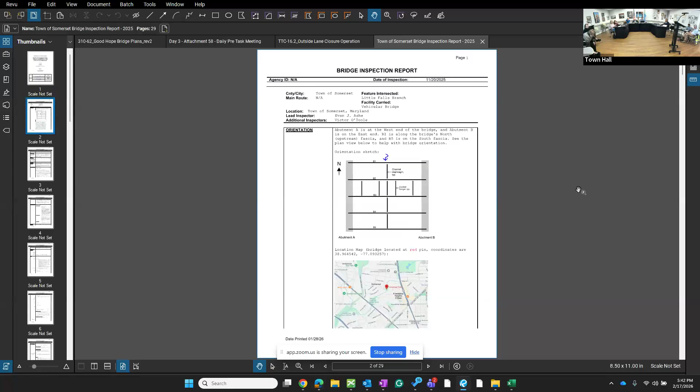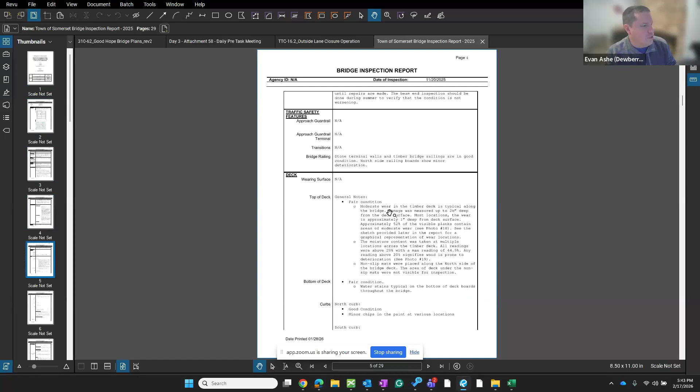So the main findings when we do these bridge inspections... could you zoom in? Sorry about that. For these bridge inspections, we try to get up close to all the major elements of the bridge, and with a bridge this small, we get up close to everything.

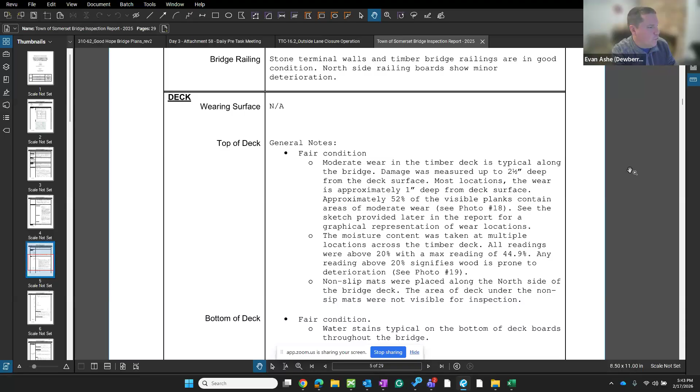The major findings - we don't see any signs that the bridge is overstressed based on the loads currently going over it. However, the one major finding we had was with the deterioration of the steel beams at the ends of the bridge. There's one beam specifically that I was able to take my hammer and just go right through the web of the beam.

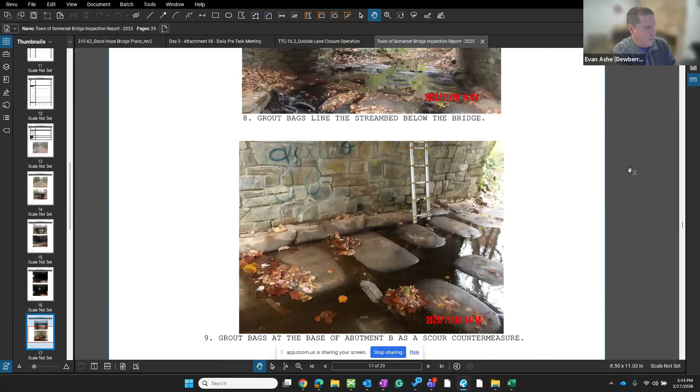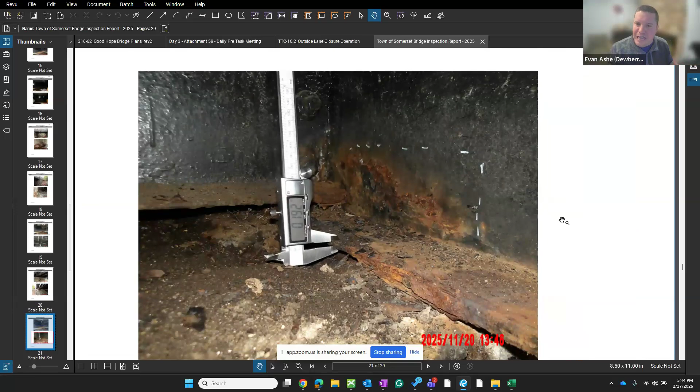Let's bring up a picture of that. I believe it's this one here, and this was similar. This is typical of what you would find at a bridge of this age. The reason it happens at the ends of the beams a lot is that runoff from just prior to the bridge tends to collect at certain ends of the bridge, and this gets a lot of moisture. So this type of defect is the main structural concern that we had.

I believe the major recommendation we made in the report was to conduct some steel repairs at the beam ends. We identified 4 beam ends that should get a repair, and that's what we're working on in the bridge plans.

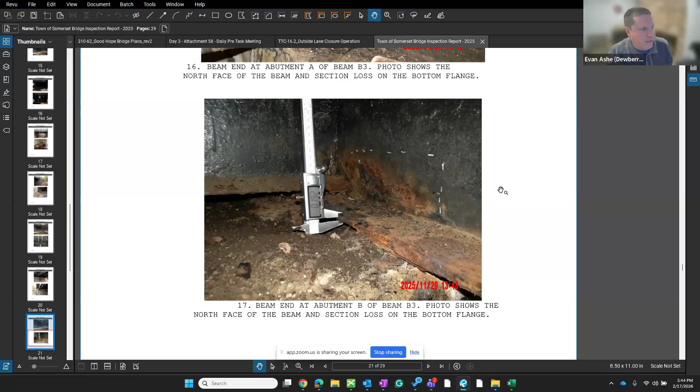In addition to that, there was some deterioration on top of the bridge deck, on the timber boards, and that's typical as well for an older bridge. So the recommendation was to replace essentially all the bridge decking on top of the bridge.

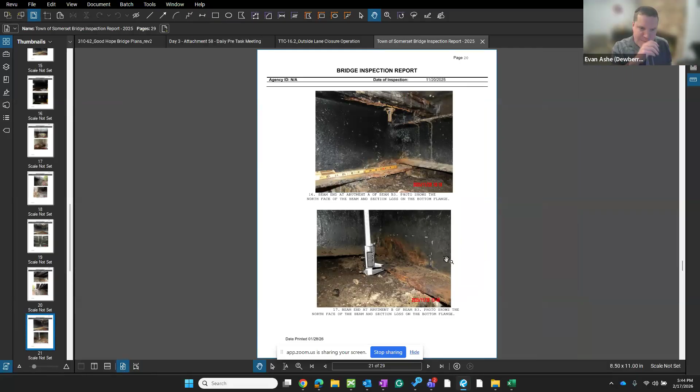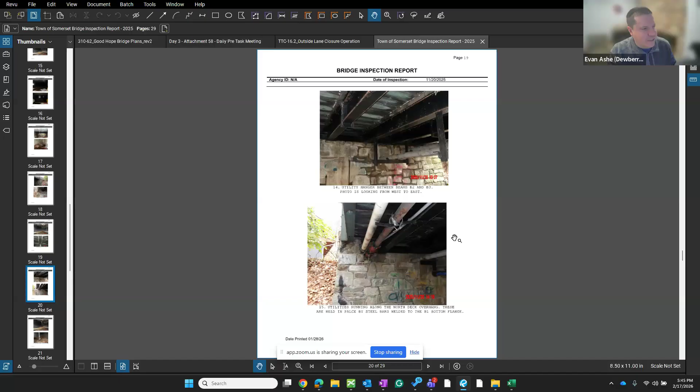We also noted some items under the bridge where the stone facade had some stones fallen out. Since we're out there doing work, we recommended those stones get replaced on the facade of the bridge.

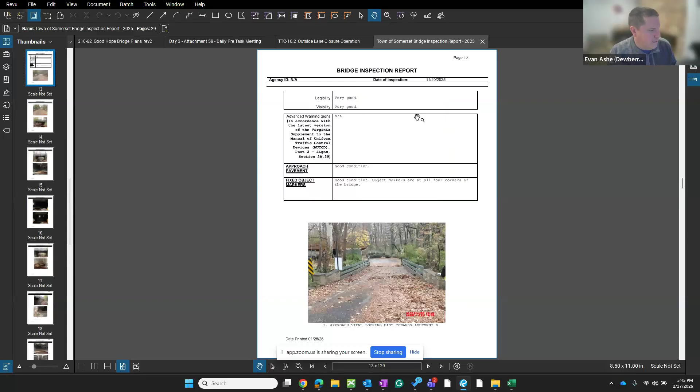We had a lot of leaves last time we were out here - let me bring this up. The last thing we recommended was to address a drainage issue that we think contributes to the beam end deterioration. If you look at the approach to the bridge, on the other side of the speed bump, water tends to flow down this slope and collect at this corner of the bridge, which is where the major beam deterioration was taking place. So as another part of the bridge repair plans, we're developing details to put a drain here to collect this runoff and hopefully protect these beams and extend the life of the repairs being put in place.

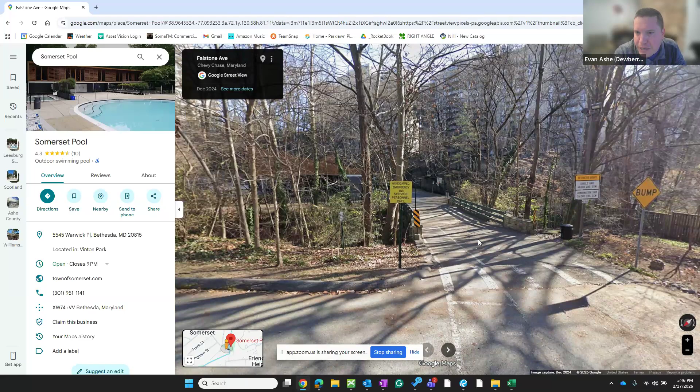So those are the major elements, and I think the repair recommendations in the report are what generated us to start working on the repair plans. Do you guys have any questions about the inspection before we dive into some of the repair plans?

Yes. I'll go first then. Just on a point of information, the wood beams on the bridge were installed recently - in fact, only in 2018. I learned that from Marnie Shaw, the former council president, who was president then. So the deterioration you see in those wood beams happened over 8 years. So to say something's wrong there is an understatement - clearly that should not have happened in that short period of time.

We're sure it was 2018 for that? Only 8 years? We have dug up the record of when the money was allocated for it, and it was 2018. I checked the tenure of the prior town manager, and that is during his tenure, so it is doubly verified to be 2018. Okay, that is a little surprising. We did not think, being out there, that they were that new.

Yeah, based on what we saw, I guess we initially noted it as an intermediate recommendation, not necessarily a high priority to get done. The second time out, we took a moisture meter and took some additional readings, and we figured if we were replacing some of the boards, we might as well replace all of them. I don't know if it was a material issue then.

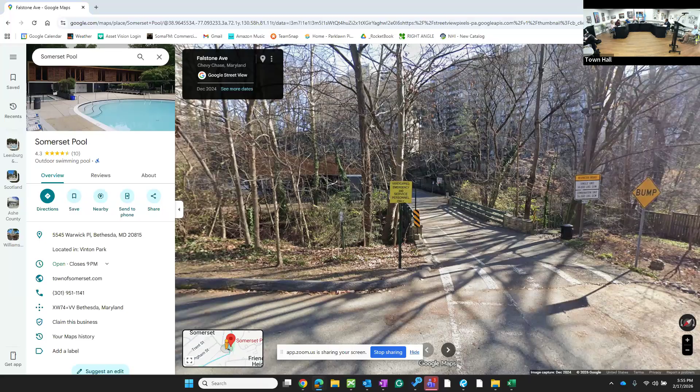Yeah, so Dewberry has submitted the preliminary plans and is getting feedback from council. Once that feedback is provided, they can finalize the plans. Then, once those are finalized, we can select the contractor. Once finalized, we'll start the permitting process while also selecting a contractor on two parallel tracks. And then once both are done, we start the work.

And to remind us—if I can ask one more follow-up—you said we can do the surface fix and have the bridge operational, and then do the structural fix later. Yes. Is that the collective understanding, Evan?

I'm sorry, say that one more time. That we can fix what are those slabs called—the decking? The decking, we can fix the decking first, and then have the bridge functional. And while it's functional, we can make these other repairs that you identified. Yeah, correct. I think the bridge is functional as is, and you could do probably any order of operations that we put in the plans to get things going. Understood, perfect, thank you.

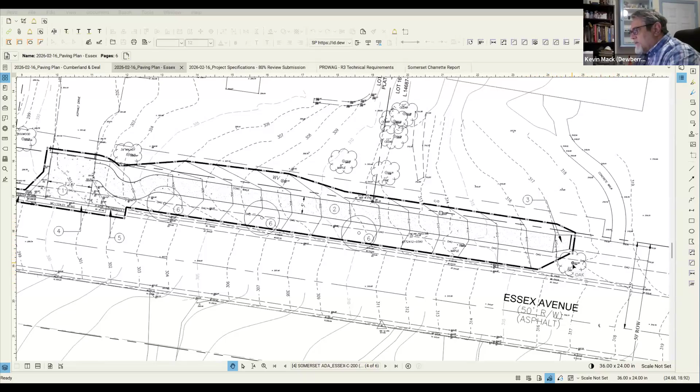Okay, so starting with the sidewalk on Essex, we've gone in and regraded the steeper section here to basically average out the grade across the entire length. We were trying to have as little disruption to the existing trees as possible. So we opted to start the work at this point rather than all the way up at the sidewalk connection or the lead walk, because it doesn't make any difference to the grade of the road or sidewalk here—it's basically the same grade. We wanted to have as little effect on this existing oak tree as possible.

Unfortunately, there is one tree in the middle here that will have to come out—this 18-inch oak tree. The amount of grading around it is too much to be able to keep that tree. And we kept as far away as possible from the existing walnut tree, which was previously disturbed when the sidewalk was put in and the house was built. So we're fairly confident that this tree will be survivable.

As you can see, the hatched area is the extent of what's being removed and replaced, and then we're going to reinstall a couple of trees here to replace the ones being taken out.

You end up with it's still pretty steep, but it's comparable now to the base grade of the street in front of it—so we've eliminated a lot of this grade here. One thing I'll point out: in order to accomplish this, we will need to acquire a temporary grading easement or rights from the property owners, because this is the right-of-way line. In order to do all this, we're going to have to go onto their property a little bit.

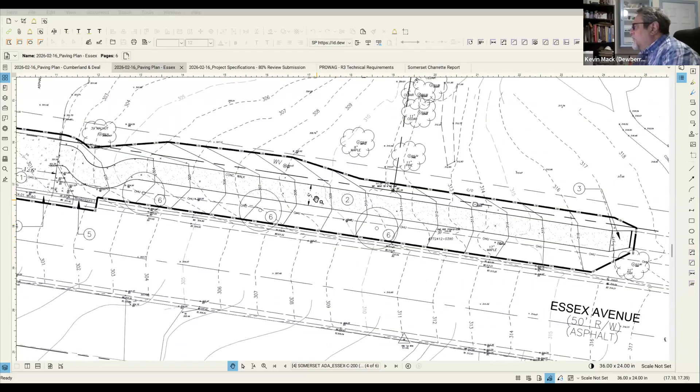I also want to mention that we're replacing the 4-foot sidewalk with a 5-foot sidewalk to make it compliant with the new public right-of-way requirements, as well as replacing the driveway here to fit all of those requirements and to use a more standardized driveway apron that matches the county standard.

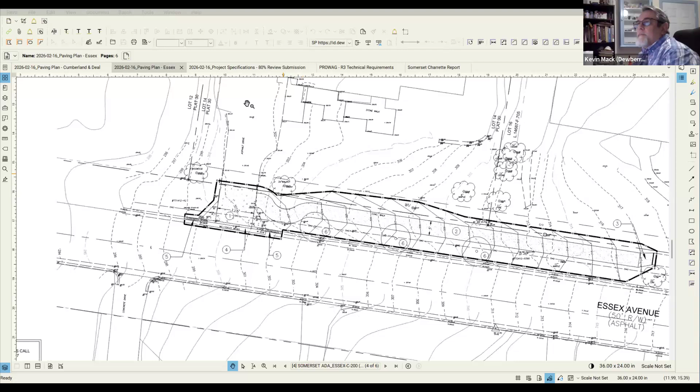In order to get around all the obstructions with minimal disturbance to everything as much as we could, there's a power pole right here, which is unfortunately located right where the sidewalk normally would want to go, but we're within the right of way, so it still is not a problem.

We're going to bring the sidewalk around the backside, which then lines up to the new apron of this driveway, and then one of the elements that we're trying to do is to weave the new 5-foot sidewalks between the aprons of driveways and the existing trees.

One problem we run into throughout the town is that the street trees are variable in their setback from the curb, so it's kind of forcing us to do a design that's unique for every lot frontage, in order to make that weave through there and not have to take the trees out everywhere and then replace everything. So we want to keep as many of the trees as possible.

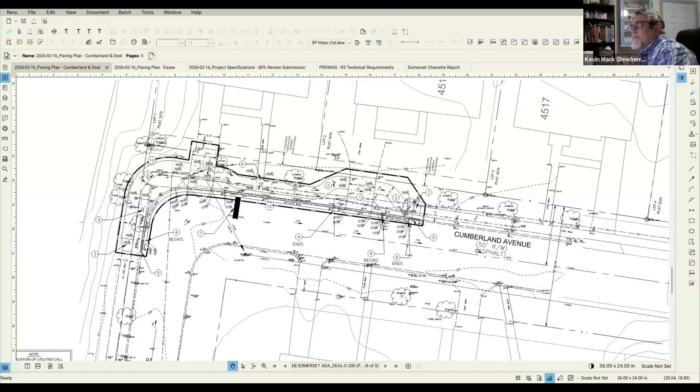So I'll start with one suggestion, which is my preference would be on that design to keep the sidewalk close to the curb side, and give the owner as much freedom with the area of the right of way as we can do. Any others got concerns about that?

Since you're on that line, if I can build on that—what wasn't clear to me, Kevin, is in the second option further down. What is the outcome for the homeowner there with their front yard and right of way? It's not completely apparent to me from the drawings. It sounded like there's minimal impact, but I'm not 100% clear, so if you can draw that out for us.

Yeah, in this particular part, this whole section of Cumberland, I think it's basically going to be the same. Everything's very flat, so grading is not really an issue there. We just need enough room to work around. One thing we're suggesting—since the existing curb out there is very short and the yards are relatively low compared to the road—we don't want to raise the sidewalks, because that would create a potential ponding issue in the driveways and front yards.

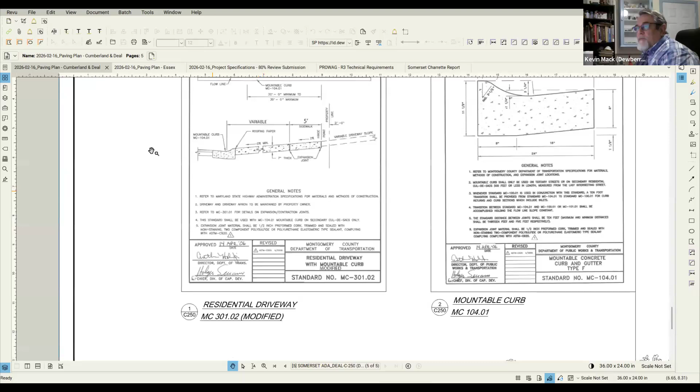Just as a reference, the standard for a driveway of this type is to have the mountable 3-inch curb at the front of the driveway, and normally that would flare back up to a 6-inch curb on either side. In this case, we're going to continue the 3-inch curb all the way along.

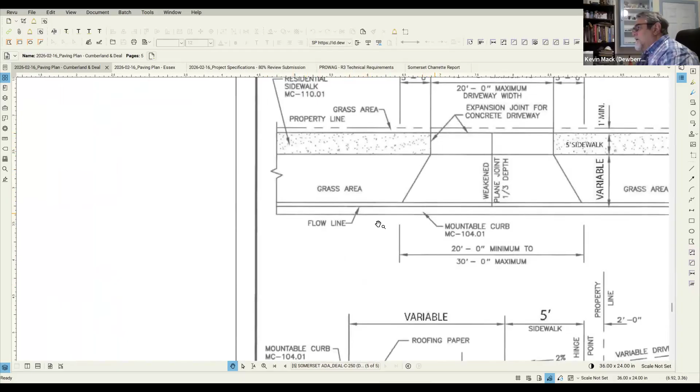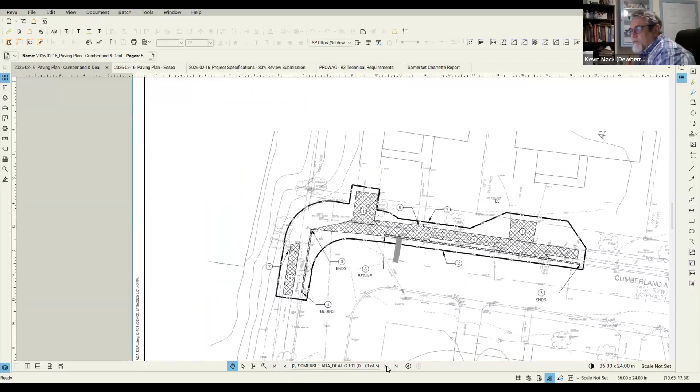Okay, and then just to close the loop, Kevin, on the earlier point—what did you mean exactly by closer to the curb for that section, given what you just said? Can you go back to that section of Cumberland you were showing? You said we have two options for that section, and the other option is closer to the curb. Why does that matter for the section you were just showing us?

Thinking forward to the future continuation of rebuilding the sidewalks—I'm trying to think ahead towards the future replacement of the sidewalks to the 5-foot sidewalk throughout the town as you get to it. I think it's a lot easier if we try to set a standard pattern for it.

I see, so you're saying for that consideration, closer to the curb is your recommendation. And then what does that mean for the right of way and the front yard of those properties right there? Can you draw out that implication if we decided to go closer to the curb there? I understand on the corner, that's clear, but just on the section you were at.

It really is a matter of about 2 feet, moving towards the curb. In this one, the sidewalk is 1 foot off the right of way, and in this one it's 3 feet off the curb. In the other one, it's 5 feet off the curb versus 3 feet off the curb.

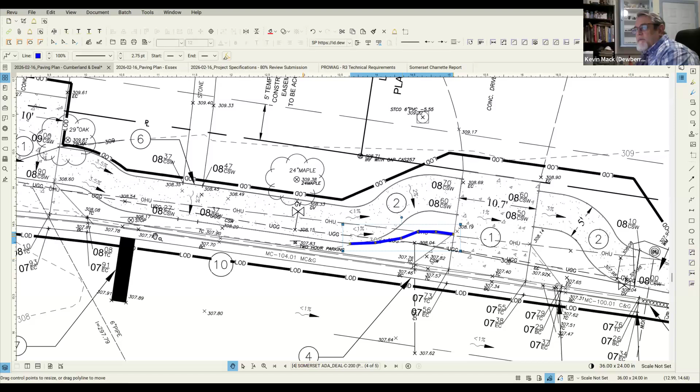Yes, okay, so there are other obstructions we have to work around on this side—we have to work around the power poles as well. And then to clarify, no trees in this particular section in terms of the work we're doing are going to need to be removed or damaged? I didn't hear that clearly from you, just wanted to confirm.

In this particular portion right here, I think this tree is going to end up having to come out because there's too much happening on both sides of it. Those trees are new, I think—they're little. Well, this one's only 12 inches, so it's not new, but it's not one of the big trees.

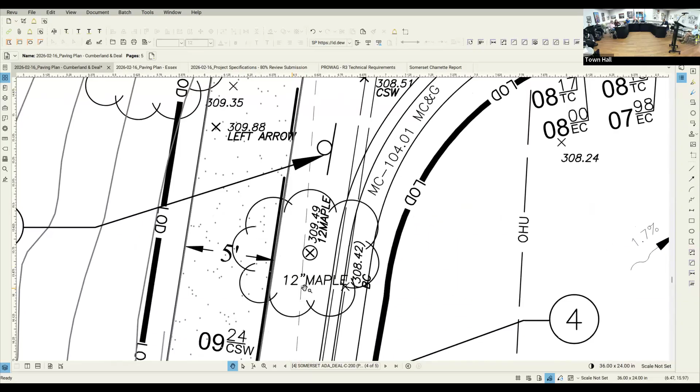Other trees on that street that Dr. Tollefson has recommended come down. It would be interesting to see, as part of the plan in conjunction with him, if some of the trees you're working around might already be in danger of needing to come down anyway. If you have a list of trees considered for removal in the next 5 years, that would help us say it's probably going to come down anyway, so let's not worry about it.

That turn right there is a very tight spot on the street. There's a lot of traffic that goes back and forth because that's the back entrance to the school. So there's that blind spot—are we worried that the sidewalk is going to encroach too much on the street, and cars might zoom too close to the sidewalk and be dangerous?

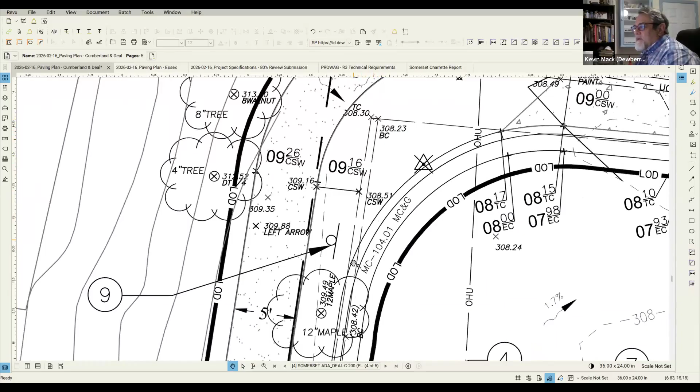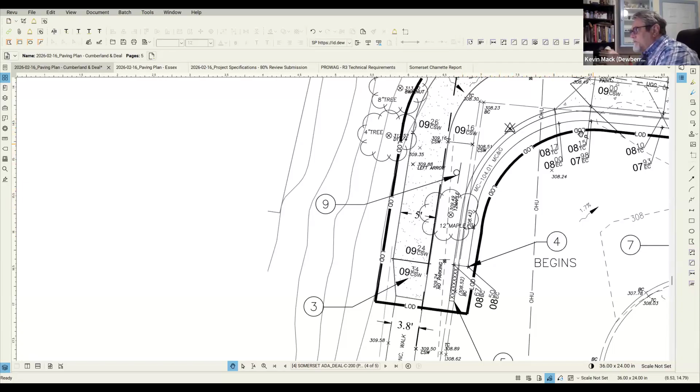This is the existing curb that's out there today, and it just kind of ends there, then picks up again along here in front of the driveway. What we're proposing is to take out this little triangle of asphalt and put in a 15-foot radius here, which will help with drainage and snow removal, and also make more of a visual cue to drivers that there's a curve here.

We still have the stop bar here and the stop sign, but we took out this corner because it doesn't serve the traffic purpose to have that corner—no one's ever going to go there. And it allowed us to pull the pavement further away from where the sidewalk would go.

Right now, if you're at both of those stop signs, two cars can't go at once—they have to take turns. There's a blind spot on that too, because that tree creates a blind spot there as well.

We did not consider that originally, but if you want to fix that problem a little better, we can increase the radius of this curve as well. The right of way is back in here, so we've got room to do it. Right now I believe this is actually a 25-foot radius—we can make it a 30-foot.

Which will pull the midpoint back about 2.5 to 3 feet. That's something we can look into, yes.

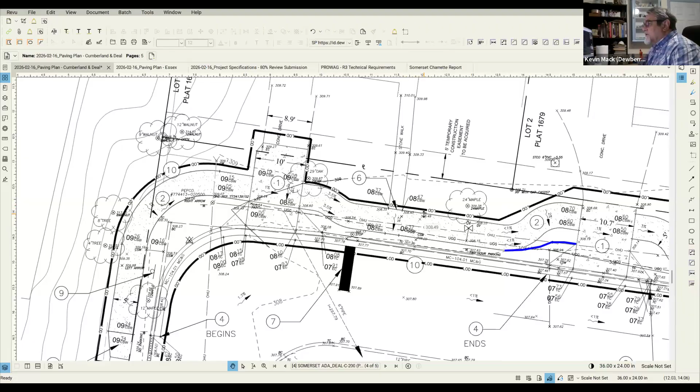Unless they really like each other, because they're going to be banging shoulders. That's why in higher traffic areas they recommend a 6-foot sidewalk. I don't think in the area around the school that will actually work - that extra foot is going to be too much to get in without taking down a lot more trees.

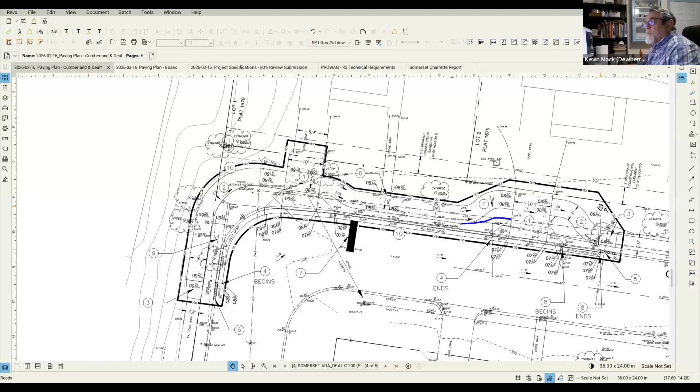On Cumberland, and on some of the Surrey area where the right of way is flatter, we can get more opportunity there. What's the other one - West, the one on the other side of the school, at the front. I'm drawing a blank on the street name, but that one I think we could probably widen out to 6 feet if needed.

I haven't really looked at those in depth yet. Okay, well what I'm hearing from the council is, first of all, the recommendation goes with the linear curb sidewalk design on this one. An updated drawing showing that as a start would be ideal.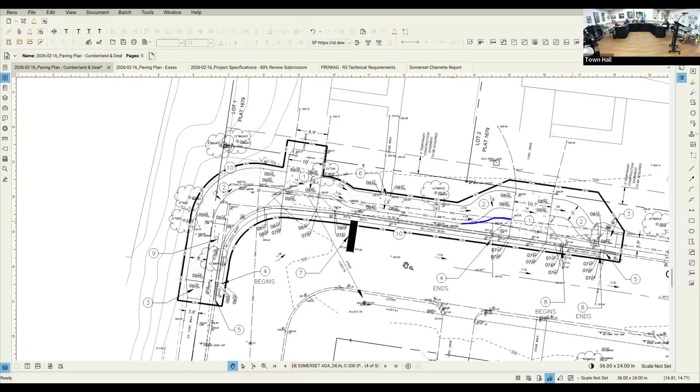While doing that, also investigate the possibility of making the other side of the intersection more gentle with a 30-degree line, more maneuverable, again with an updated drawing, to inspect if there's anything that makes that more difficult. So we're holding off on extending the 5-foot sidewalk further down by the school for now, because the issue is going to be what do we want around the school, and we haven't really faced that yet.

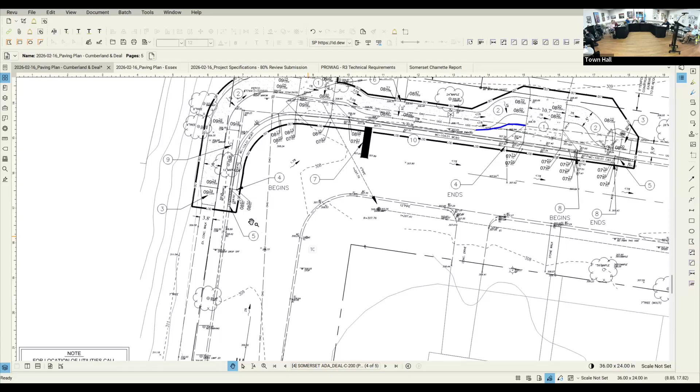And on the Essex one, just to clarify exactly which trees - if you go back to the Essex drawing, you pointed out there was one tree that has to come down. Actually, I misspoke, it's actually 2 trees: a 17-inch maple and an 18-inch oak tree.

I mean, only to be absolutely comfortable and clear-eyed about this. That'd be good. They are 2 town trees, right? Yes. On Essex, I would point out that the power line goes right through these 2 trees.

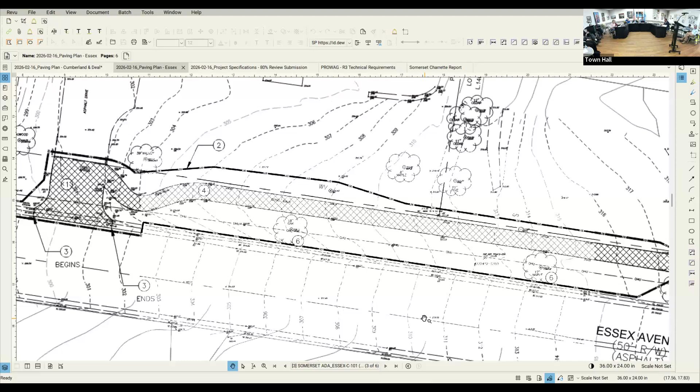So we were actually proposing that the replacement trees will be smaller trees that can fit better under the power lines. Dr. Feather is aware of that, and he'll probably agree with you there. He's our arborist. By the way, what is the slope that you're proposing, and how close is it to the required slope?

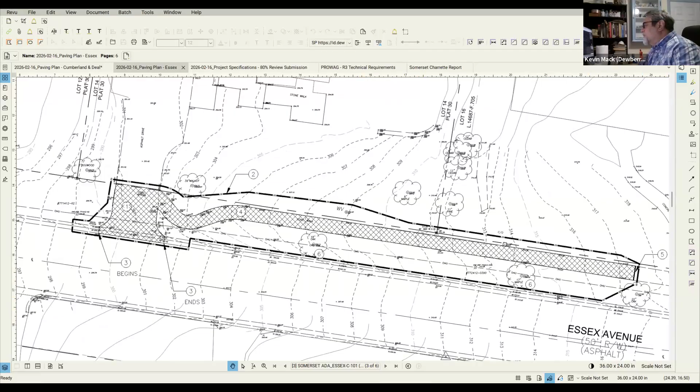The existing grade on the street is about 11.5%, almost getting up towards 12%. The proposed grade is at 11.7% along the whole length of the reconstruction. All right, so it's still steep, but...

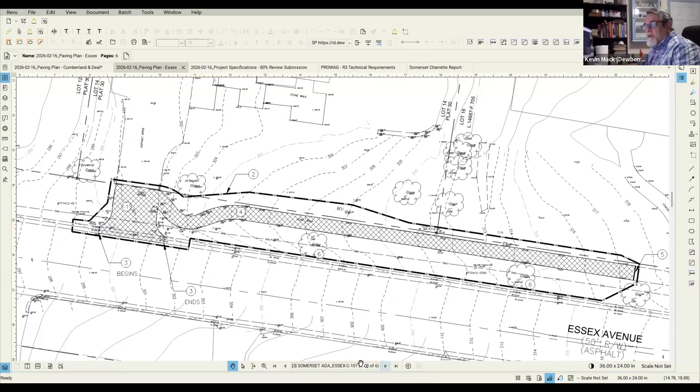Not as steep as this portion right here, which is what caught everybody's eyes. That's a cliff there, I agree. Yeah, so we've pulled the grade back here almost. We're lowering the grade about 3 feet at this point here.

Any other questions for Kevin on this one? Do we have any questions on the charrette report that they submitted? Is that what we're moving on to next? Well, it is part of this. This isn't like a discussion on next steps at this time.

If Kevin wants to briefly touch on it, we should say that, remember, we told the council that we met with Dewberry about the charrette results, and basically it's going back to the committee. It's going back to the Public Safety Committee to start all over again, which I've been saying at several other public meetings. Just to be clear, what we have in our packet is the presentation they made.

With minor changes, right, it effectively is. The charrette report has the presentation, and it also has a summary of comments that were received. Yes, and so you're looking for our reaction to those comments?

Just any questions on the report? Just if the report can be finalized as a product. Do we accept the report is really what I'm trying to get at, as a report of the meeting, so that way the committee can use it, the council can look at it.

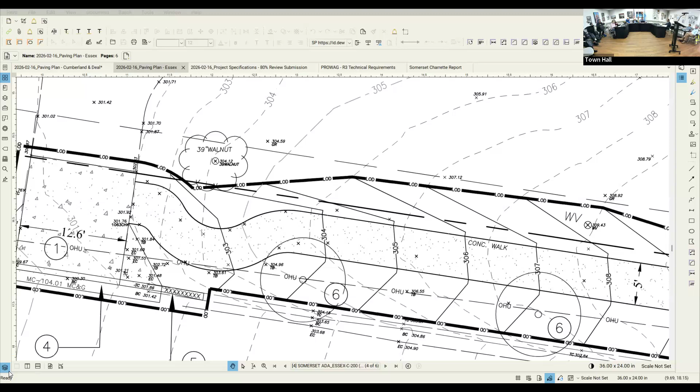It's late. They're not letting us talk. Late night Thursday night, sorry. Sorry to interrupt.

So, Ron, do you want to walk us through what you've put out for us?

Yeah, sure. So in the packet, there is a proposed ordinance, and the ordinance has just been drafted, not as a recommendation per se, but just so the council could see what some possible options for regulating coverage could be. This is based on very helpful research and analysis that Steve has done, so I'm glad he's here tonight to help us talk through these.

So basically, there are three general ways to accomplish a lot coverage regulation. First is to regulate—I'm getting feedback. Is everyone else getting feedback too? No? Okay, let me just adjust. Maybe Justin can do anything. The acoustics are okay, but are you still getting it, Mr. Town Attorney? Testing 1, 2, 3. It's on his end. No, it's better now, he fixed it. Justin fixed it. Awesome, we give Justin credit. Totally.